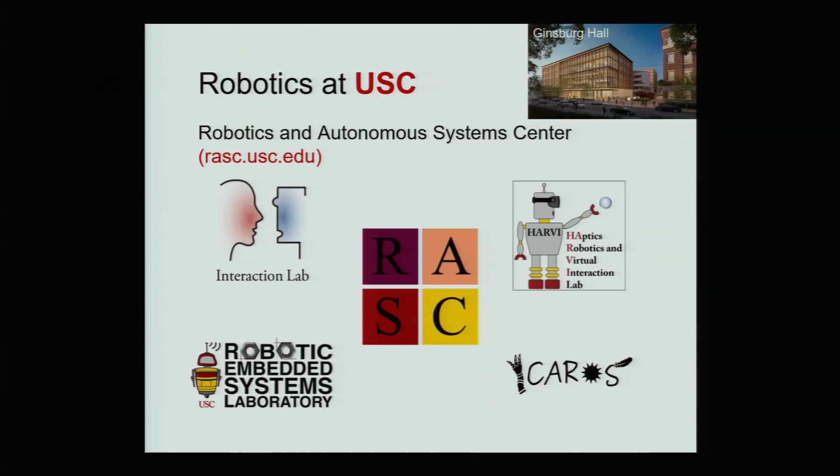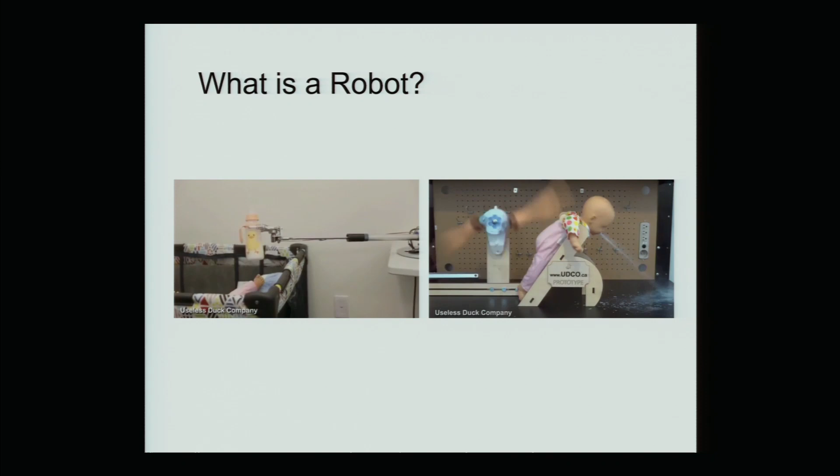So we're going to start with something relaxing, and just ask the big question: what is a robot? When you talk about a robot, what's the first thing that comes to your mind? Usually when you're trying to use a robot, you're trying to use a machine to do something for you that's dangerous, dull, or repetitive for humans, so that you can spend more time on the things you're really interested about. But usually it doesn't really work out the way you want.

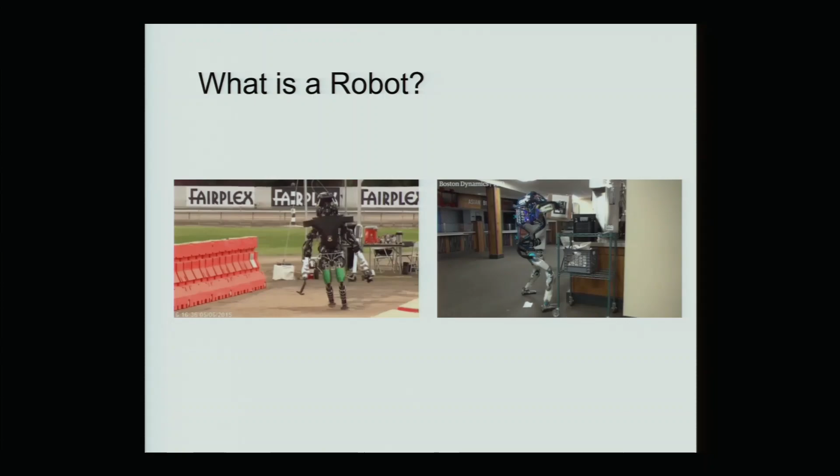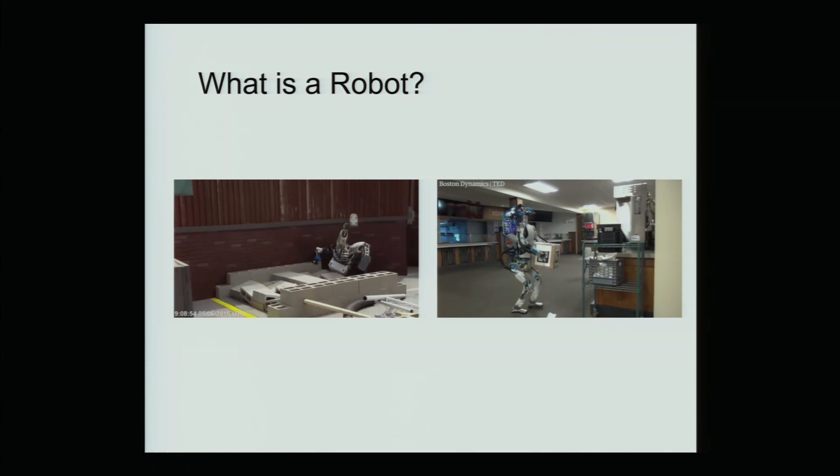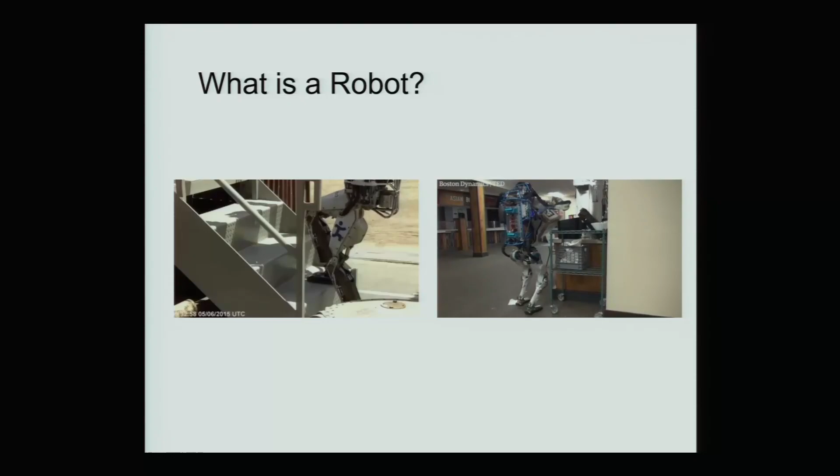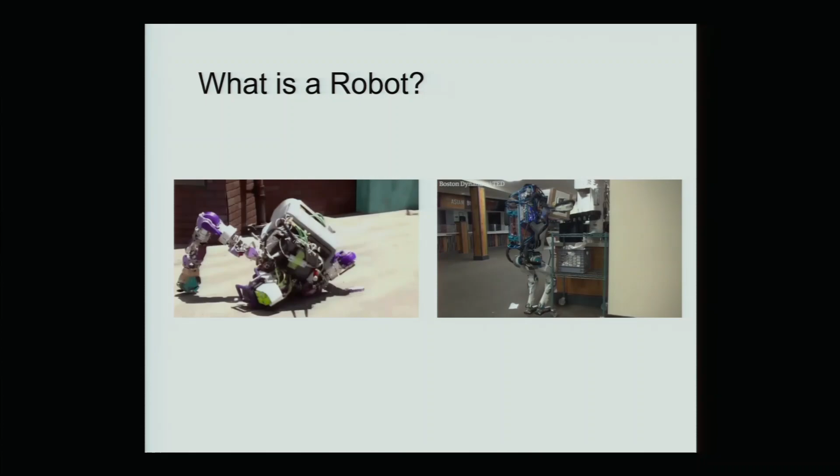So here are more videos, videos of failure with serious humanoid robots, which is a very challenging problem in robotics, considering the whole body coordination in contact-rich environments. A few years ago, there was a DARPA Robotics Challenge asking researchers to create humanoid robots that can do human-like tasks, something like going up stairs, getting out of a car, or doing a simple task like rotating a valve. You can see that any errors in the perception and the action will cause disaster in most cases.

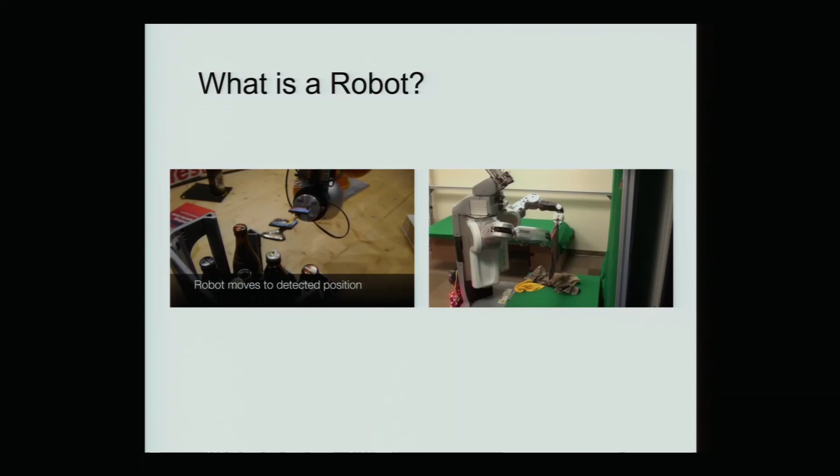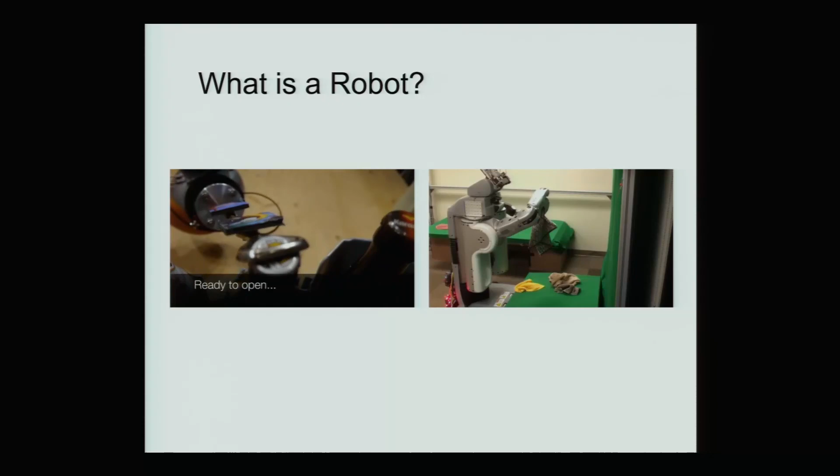So what we really think about is a robot. Here are some good or successful examples where robots are executing daily activities. First, on the left side, there is a robot gripper, a robot manipulator, trying to open a beer. As we know, the robot that opens the beer is always the best robot.

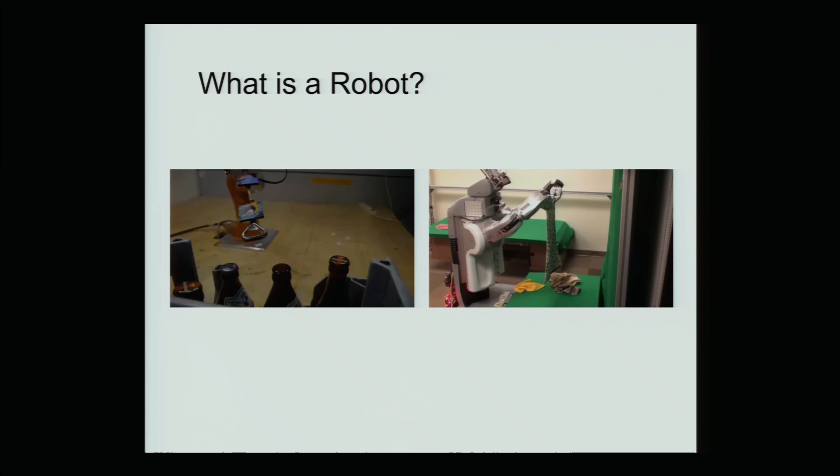In this process, usually only vision is not sufficient, because when you're trying to open the cap of the beer, you need precise force feedback as well, to tell the robot, to inform the robot which state it really is, and then the robot can execute the further actions.

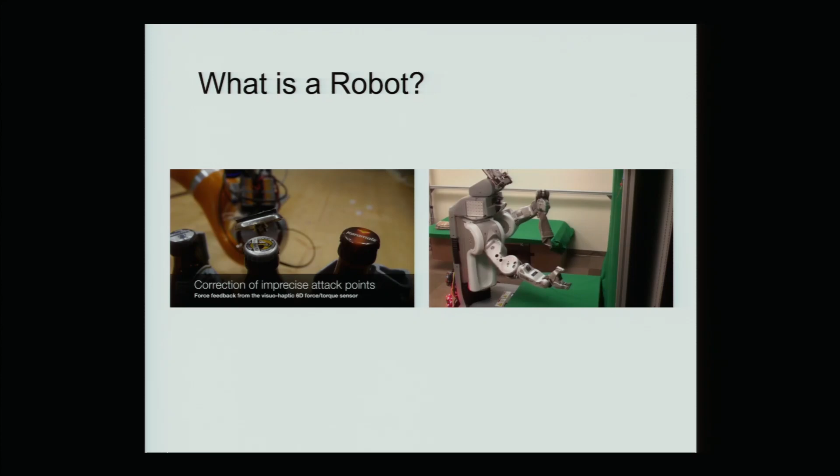And on the right side, this is a more challenging scenario where robots are dealing with deformable objects. The hard part of the deformable object is that it's very hard to describe the current object state. Imagine that the bottle of beer is just a bottle of beer—you can describe it, probably the first thing you think about, as a pose, the 6D object pose: X, Y, Z, roll, pitch, yaw. That 6D object pose is definitely one way you can describe the object.

And also, if you have further, more advanced representations of the object, including something like the center of mass, material properties, or even the internal structure, including how much liquid is in the bottle—you can create a list of the object states you are trying to track for a beer, right?

For a bottle of beer, but for a deformable object, for a simple cloth, it's very hard to describe the current state of the cloth. In computer graphics you usually use the object mesh to create the shape and current state of the cloth of the deformable object. But those meshes, first of all, have super high dimension, and second, are usually highly occluded by other meshes, by other points. So it's very hard to simply create a unified way to describe those deformable objects. For robots and humans, we may use empirical experience to just pick up and fold a cloth, but the robot needs an explicit description of the object states before it can execute any further actions.

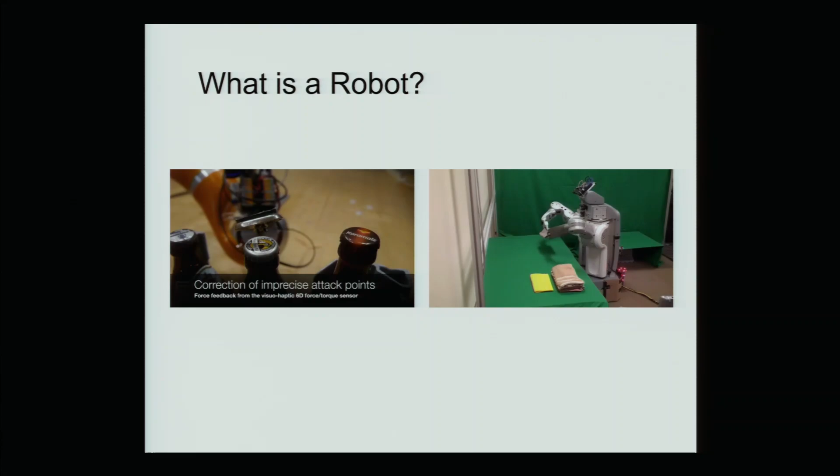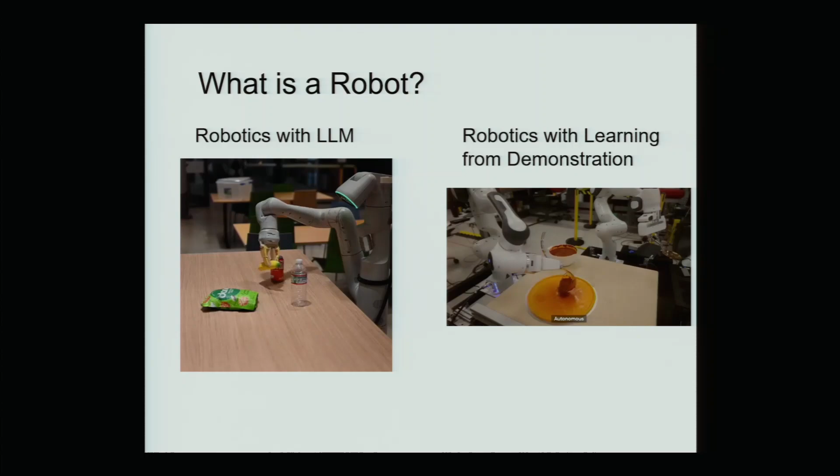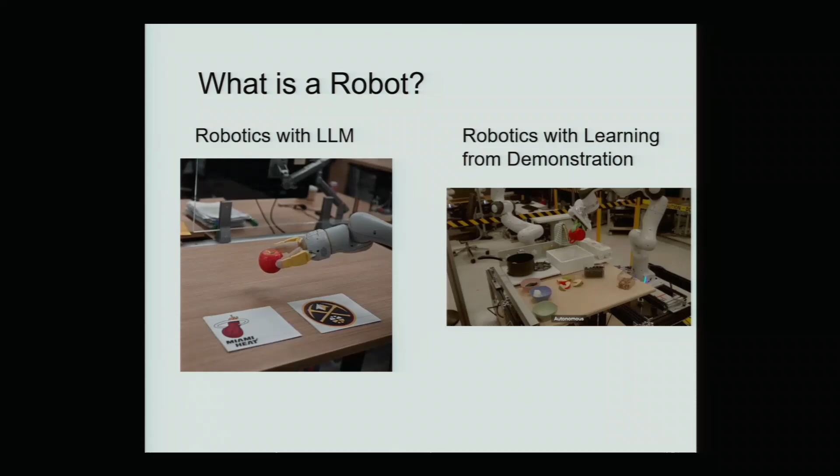And these days, especially in the last year, coming with large language models, robotics researchers are also trying to catch up with this trend. There's a huge amount of research about robotics combined with large language models, and at the same time people are doing scalable learning from demonstrations, from data collected through a crowd-sourced data collection process across multiple universities. For robotics with large language models or visual language models, people are trying to combine the ability of reasoning through those large language models with robot action directly, creating an end-to-end reasoning through image and language to action output for the robot.

Here's an example: giving the command to place the apple on the table, I believe with the NBA championship of last year. The robot can directly do the actions to place the apple on the logo of the Denver Nuggets, something like that. Traditionally, this process is separated into multiple stages, including object state estimation, motion planning, and reasoning, and then generating the final action output. Nowadays, because of the ability of large language models, people believe all these intermediate steps can be replaced by the black box of the large language model to directly generate action output.

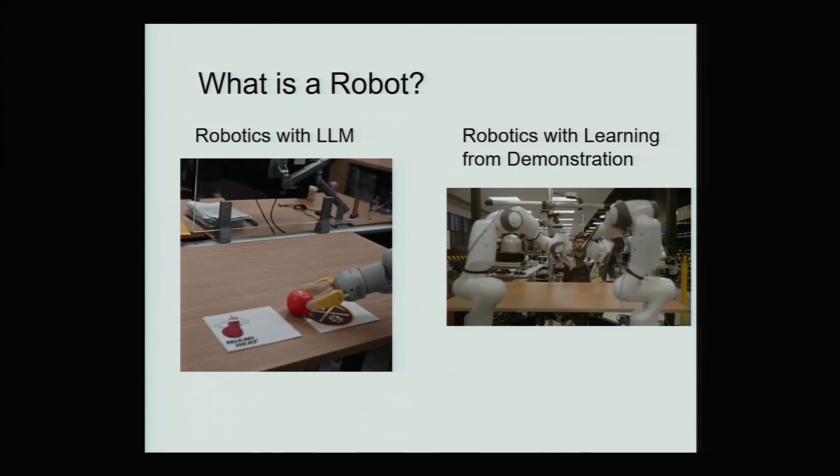So there's a huge debate about robotics these days, because people believe computer vision and natural language have somehow been addressed or solved because of the power of large language models, huge datasets, and large language models these days. So people are thinking, why hasn't robotics been solved yet? Isn't robotics just a share of computer vision and natural language? Is it really true? Some people believe it, and some people don't.

If the robot is just a share of CV and NLP, will robotics be solved by the methods applied in CV and NLP? Also, there's a huge debate about whether we should focus on the development of the generalist robot or the specialist robot. A generalist robot has a specific form factor which can actually do a set of tasks quite decently, or you have a specialized robot, which is an expert on a specific task. What kind of robot should we go for in the future, and which one is more promising in terms of the technology difficulties?

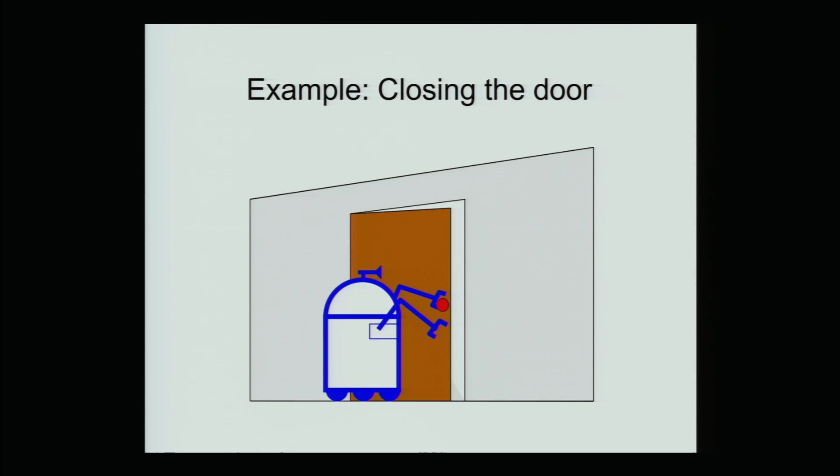All right, continuing the example we talked about in sensing, but now we are adding the actions into the system. The action we are taking here is close the door. U is close the door. First we need to define the state transition, or the action model, in our system when we're doing the action of closing the door.